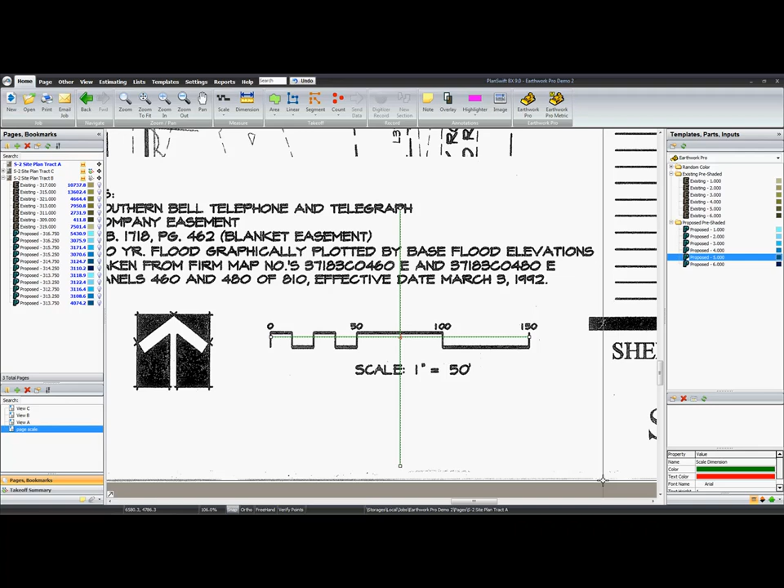Here it says 1 inch is equal to 50 feet. We can set that scale here from our drop down menu, 1 inch equals 50 feet. And when we get our disclaimer, we need to double check that the scale is set correctly. So we'll click agree and choose the dimension tool to check the scale. Now this scale shows 150 just past the line, so it's really off by maybe a few inches.

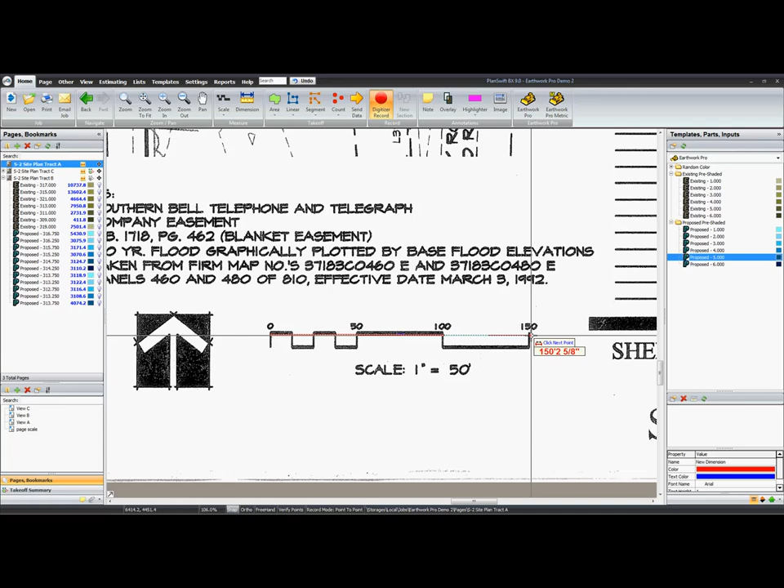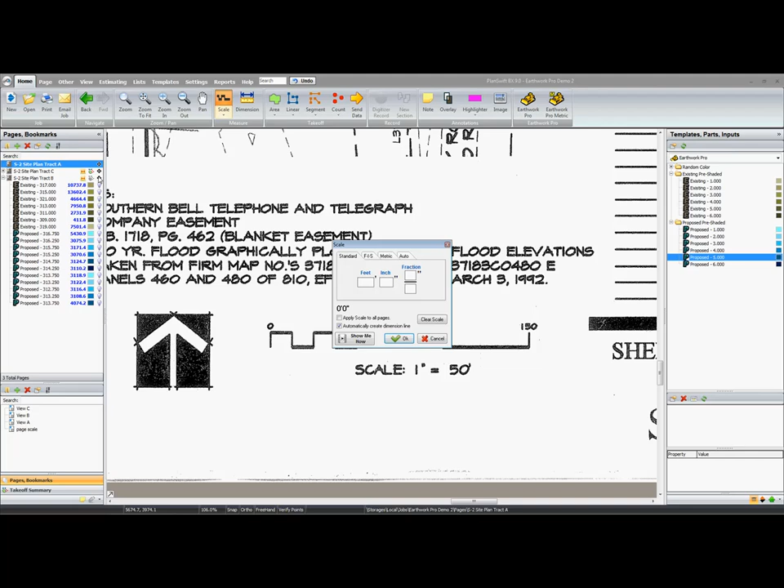I can go ahead and redo the scale by typing in the dimension needed. So I'm going to go to my scale button, click the upper portion of the button, and clear the scale off of the page. You will notice that this marker, this indicator here on each page, will go ahead and clear out the scale.

So now we want to go ahead and set the scale equal to this dimension from 0 to 150. And we'll begin by clicking scale again. We'll type 150 and click OK. Now the program asks me to click the first point of the dimension for scaling.

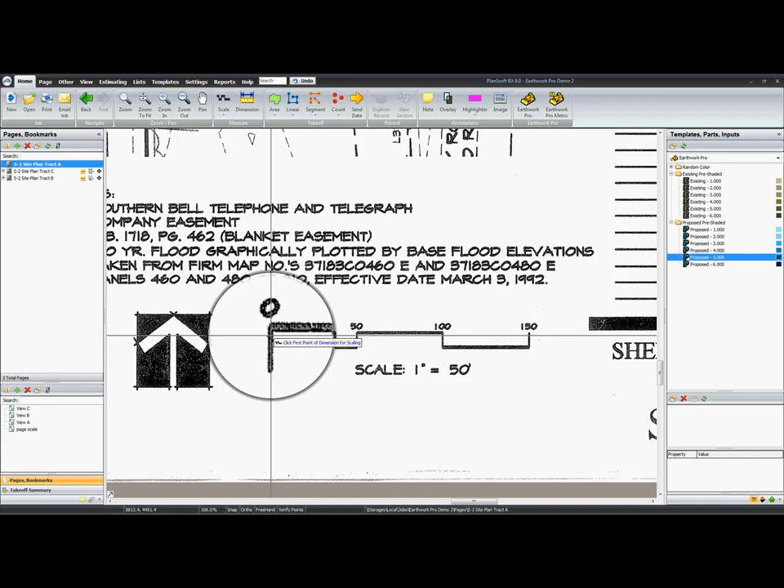Now if I press and hold down M on the keyboard, I can magnify and zoom in to the center point of the line, and this will make my scale more accurate. However, it's only going to scale this in the x-axis. I also need the y-axis set to scale.

So the way we can do this, if we don't have a dimension going vertically, we can take the dimension line we just used, click on it to select it, and then I will go to my other tab and click rotate to the left to rotate that dimension line. Then I can now use my own dimension line to scale this page vertically. So I'll go back to my scale button, I'll click that, and I'll type in 150 again and click OK.

Now to get it exactly to the distance I've already set this dimension, I'm going to click the snap button. It's down on the bottom toolbar of PlanSwift. There's a black toolbar. When I click snap, I get a red box that snaps to points that I've already set up, and that will set my dimension in the X and Y axis, and you can see that by that marker here on this page. You always need to make sure your pages are set to have both X and Y axis.

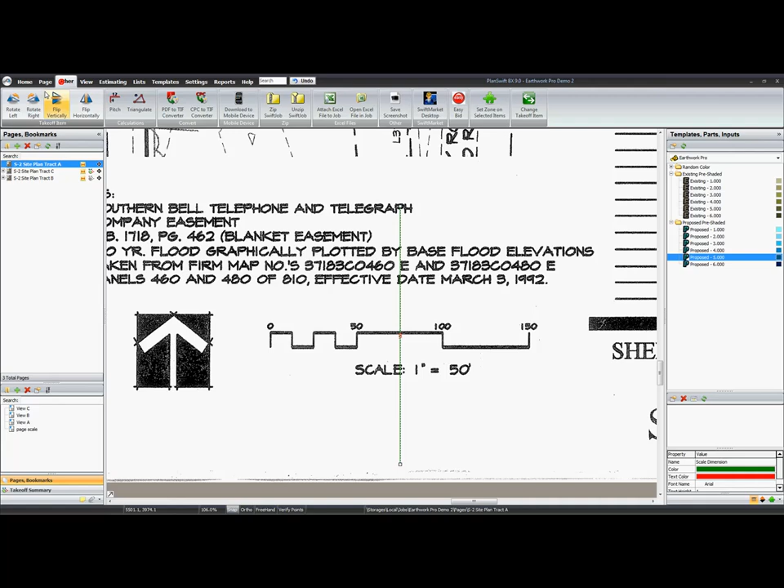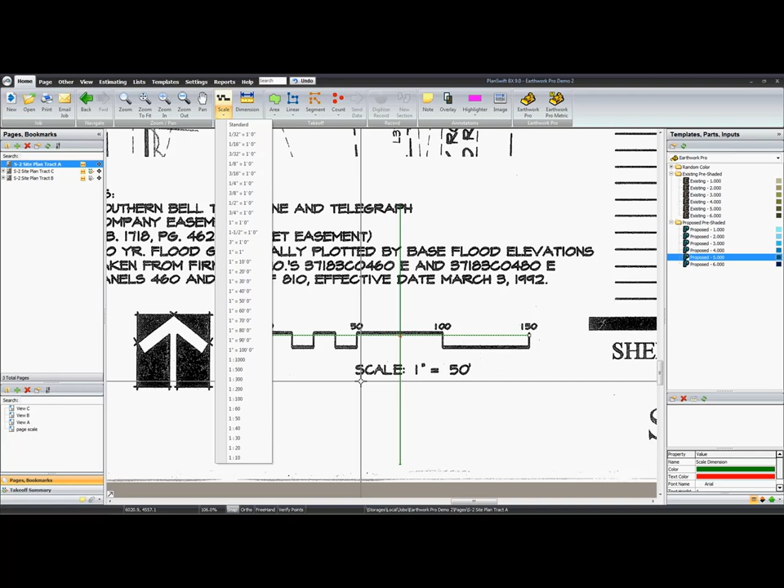And by default, when you use the automatic scale or the drop down scale here, it does automatically scale in both the X and Y axis. However, it is critical to note that when you use this drop down scale, you do need to double check dimensions to make sure your scale is set properly. Once you know your scale is set properly, then you can begin.

So I'm going to go to our area of interest. For this demo, we're going to be talking about lots 23 through 33. This is what we'd like to analyze. And basically, we need to take a look at the existing contours and then the proposed contours.

Now, Earthwork Pro for PlanSwift is much different than other programs that are out there. PlanSwift is really a two-dimensional program, and we use two-dimensional tools, but we're going to add in a third dimension by assigning each area of interest an elevation.

So on the right hand side of PlanSwift, you'll have a drop down menu, and after you've installed the Earthwork Pro plugin, you'll see this Earthwork Pro option. Same for Earthwork Pro metric. And when we click that option here, there's 3 folders. The first folder has random colors of these 2 templates, existing and proposed, with just a generic 100 elevation there.

I personally prefer to use pre-shaded coloring, and it will assign a color of brown for existing or blue for proposed. Now the numbers 1 through 6, this just means there's 6 values of shaded brown. These numbers are just really placeholders for each shade, and you can use them over and over. All of these are essentially the same template with just a slightly different color. So if I use 1 through 6 and I need to do a 7th or 8th, just cycle back through the numbers.

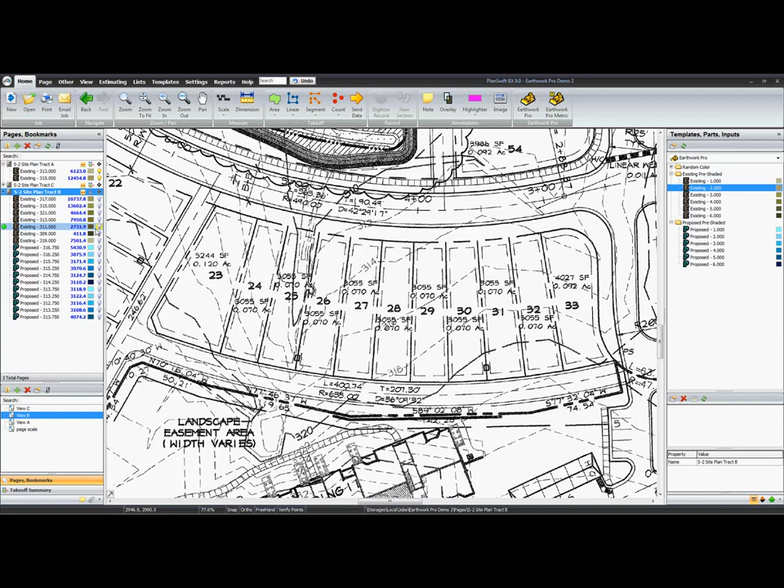So after doing all of this for all of these existing contours, what we'd ultimately end up with, let me show you a different view, would look like this. As we fill these in, again starting from 313, we'd have that contour, and you'll notice on 313 this contour went up and came back across lot 33.

So one of the things that I may need to do, once I've put in this 313, would be to create a new section of that, and I can right click anytime on that section and just choose the option new section from my right click menu, and I can come back and continue to digitize to create that new section here.

Okay, so again, we had so far 313, then 315, then 317, and then we had 319, 321, 311, and 309. And all of those existing contours basically created this blanket of area through my entire site of interest, lots 23 through 33.

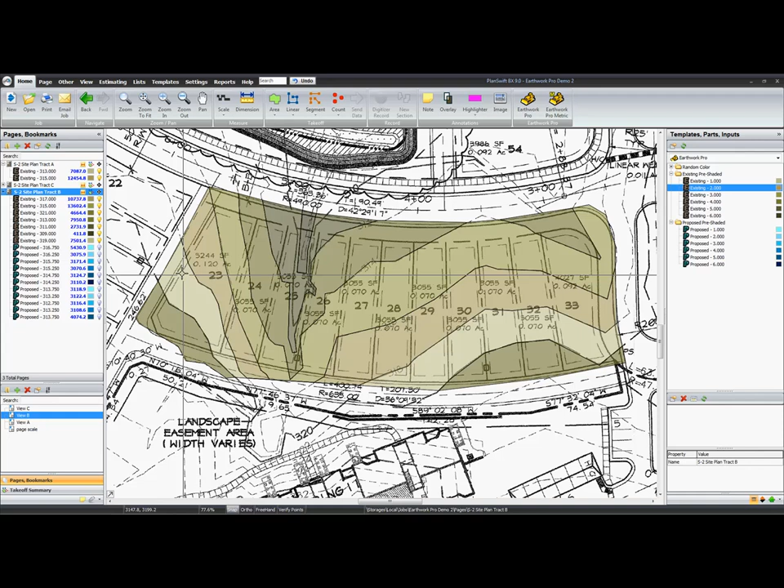The next thing we would do would be to create another section of the lots or the proposed areas themselves. Now, on certain plans, you're going to have just spot points or point elevations or spot elevations for your proposed. Maybe it would be the top of curb, or it would be a foundation. Ultimately, you just have to kind of create where those contours would be for your proposed.

Now, in this particular example, I used each lot and assigned each lot an elevation. So you can see when we go in and turn on these layers, each lot itself had an elevation, and we assign that lot a specific elevation going across the board.

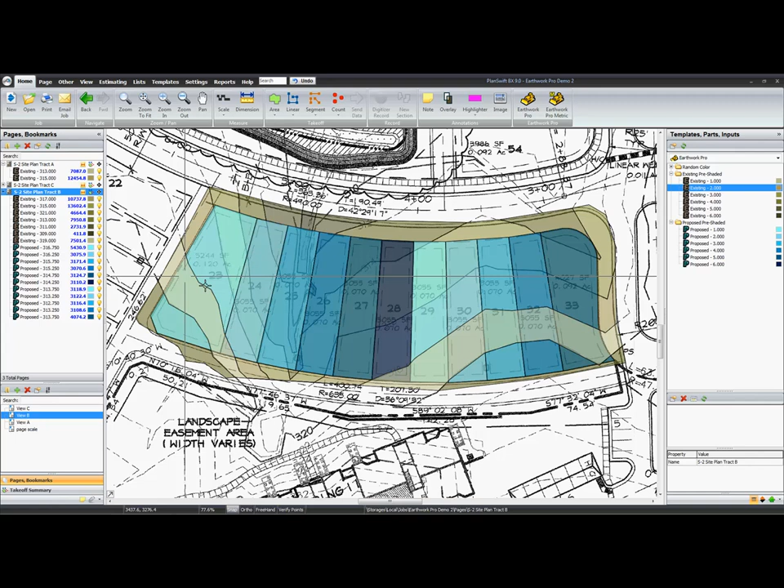Okay. Now, ultimately, where these lots for my proposed overlap my existing, that creates an area of interest. What will be analyzed is wherever these two different types overlap each other. So wherever I have proposed overlapping existing, that's where we're going to calculate our totals.

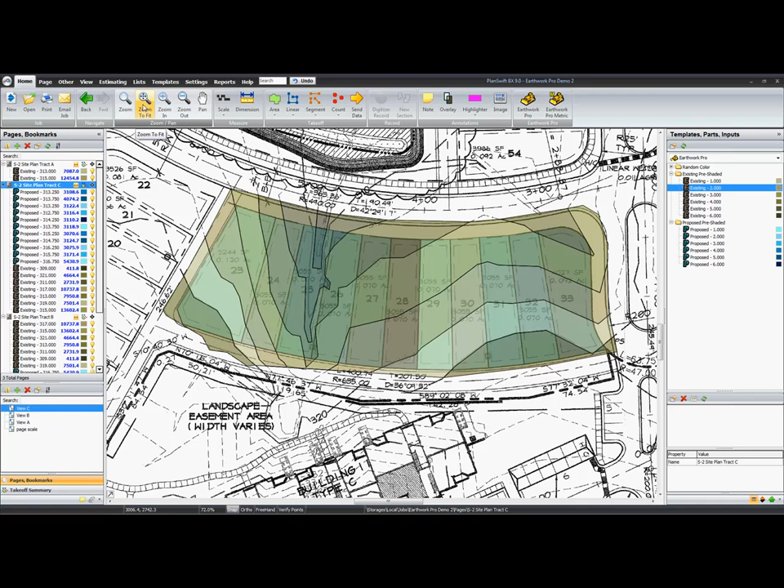So now moving on, we're just going to go to another view real quick, and we're going to select the area for calculations. Now, what I actually like to do is hit my zoom to fit button, which will show me the entire page, and then I can come to the top left corner of the page and left click and drag this light blue box, which will select everything. The reason I do this is I want to make sure to select all of my areas, so we can see that they are all selected here.

And then once I know I have everything selected, both existing and proposed, I'm going to click Earthwork Pro. Selecting Earthwork Pro pops up this little window here for the tool. Now, you have a range of calculation sizes. You can go from as small as 3 square inches to 2 square feet, or 24 by 24 inches. For a site like this, I'm going to choose 12 by 12 inches.

I'm going to analyze the entire site with an invisible grid. So at every single square foot, it's going to calculate the difference between existing and proposed and give me a volume. And once I get those volumes, it's going to also sort out which ones are cut and which ones are fill, and then give me a total of cuts and fills at the end of the calculations. So that's your calculation size.

You would want to use different ranges. Maybe for a fast food chain on a corner lot that's smaller than half an acre, you could use 3 inch by 3 inch. But anything that's several acres large, you'd want to go up in size. And so for now, we'll just go ahead and use 1 square foot.

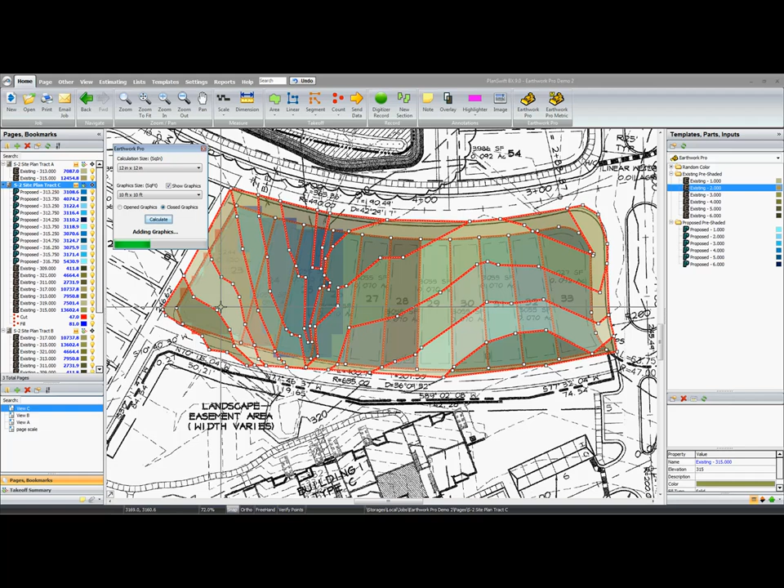The graphics, you can see, are kind of filling in these squares. Red squares would mean that there's a cut. Blue squares would mean there's a fill. And the size of each square in this particular case is 10 feet by 10 feet. And we can make them a little smaller, but PlanSwift's memory can't hold all the calculations and the graphics. It's too much for it to bear.

So you'll notice now everywhere where I've got this red in my area of interest, this would be where we're going to have to cut. So our existing would be too high. Everywhere where we've got blue, we're going to have to fill. So our existing would be too low. And this just gives you a good idea of where you're high or low.

You'll also notice it adds in a value here. This 261, that's how many white points there are. Okay, we're basically just using a square point count tool to generate these graphics. So that 261 does not mean how many yards of cut. This again does not mean how many yards of cut. Neither does this 112 mean how many yards of fill. What this actually means is there's 112 points here in the graphics.

Where we're going to go to find our values as far as cubic yards and how much actual volume we have, we're going to click on reports. And we're going to go to a report here on your report layouts. There's a report called Contour Breakout. This is where we actually see our cubic yards in total. So for each different contour, for contour 317, we have 988 cubic yards of cut. That value is in my cut column.

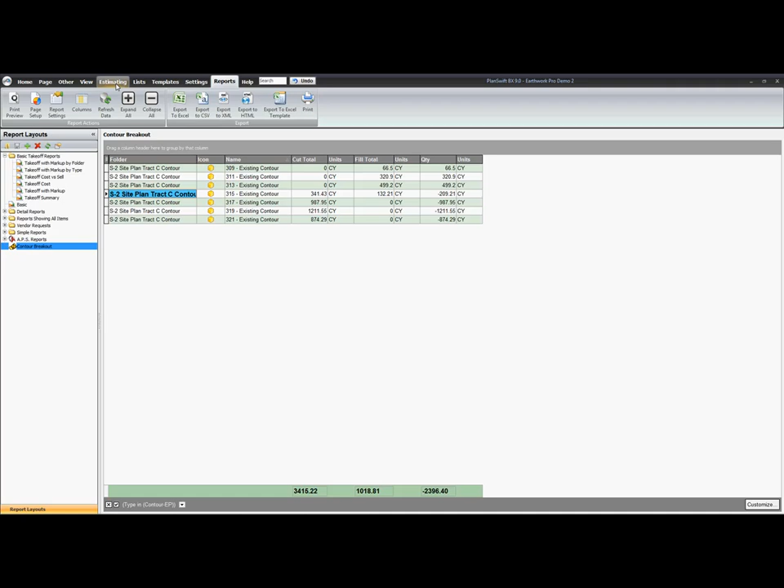So again, going to the estimating, you can right click on Earthwork Controls, go to Properties, and adjust your values here as a percentage if you need to make adjustments for expansion or contraction or any swell factors that you may use. And then I can set those back to 0, and these would be my bank cubic yards. Just a couple of other things that I want to mention for Earthwork Pro.

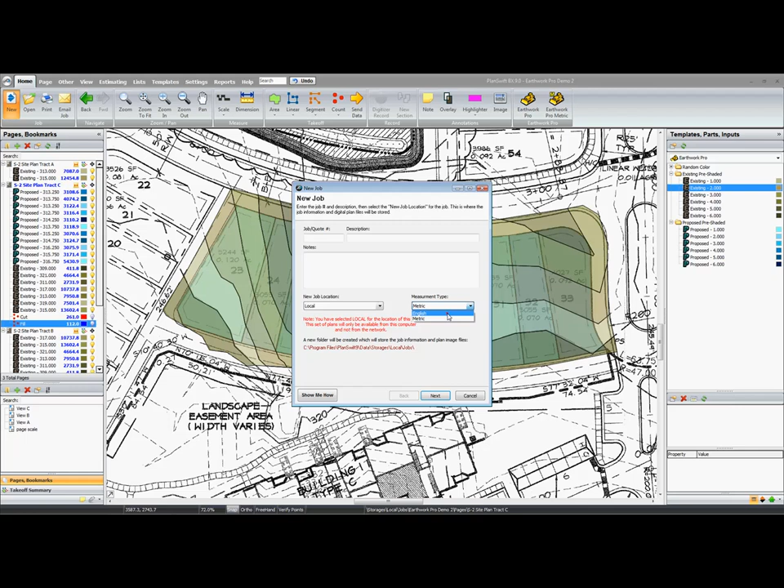If you're using the Earthwork Pro metric, you need to make sure in your settings that you go to the General option and set your default units to M for just meters. You want just your default units to be set to meters. You also need to, when you're creating a new project, make sure you set your measurement type to metric. Again, this is if you're using Earthwork Pro metric. So you need to have your default units set to meters and make sure you set your measurement type at the beginning of the project to metric.

That being said, let's say we wanted to analyze this again and do it on a more precise level, or let's say we want to look at the difference between how our cubic yards would come out if we calculated at 2 by 2 instead of every square foot. I'll just show you that here really quickly. So we're going to reselect it. We're going to click Earthwork Pro again. We're going to change our calculation size. And this time I'm also going to show what the graphics would look like if you choose this option for open graphics. It's basically going to just put in kind of a grid instead of a box.

So we'll go ahead and click Calculate, run our calculations, and then we're going to now add the graphics here, and it puts in more of a grid instead of a box. But again, it will still show red for cut and blue for fill. And it's again a personal preference if you want to show one type of graphic versus the other. Both of these are basically set on a grid of 10 feet by 10 feet. We'll get a glimpse of that here in just a moment. But again, anything that you choose for graphics has no bearing on the actual calculation.

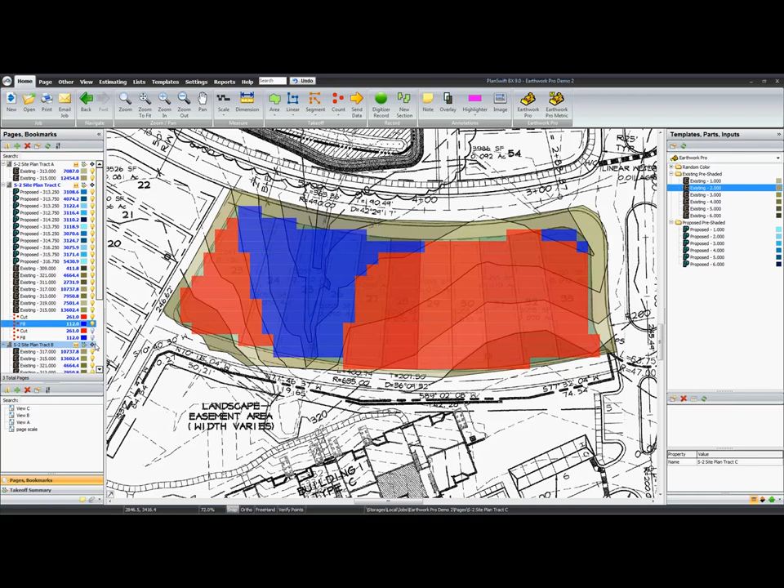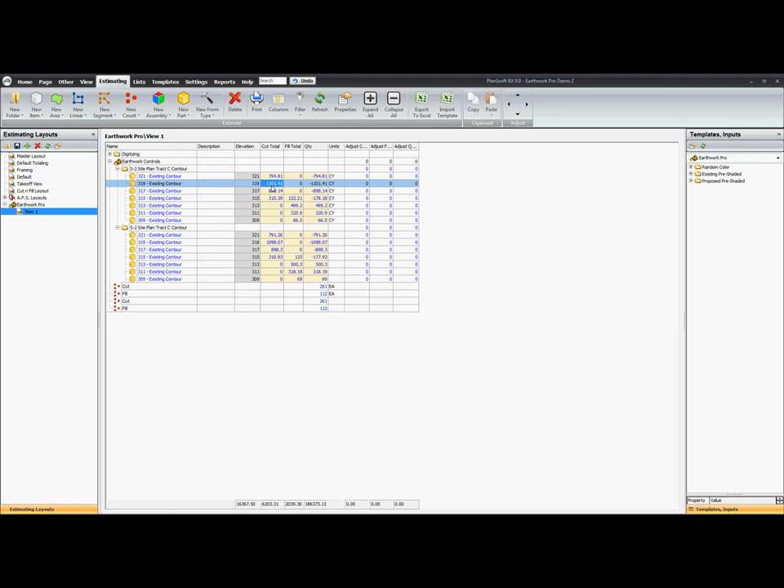But again, you also want to balance when you're talking about these calculation sizes. You want to balance what your computer's memory can handle. So if your memory starts to bog down on too small of a calculation, you can cancel that and go to a bigger calculation and it will run just fine. You do get a difference, but you can see just a few yards, 3 cubic yards here and a couple cubic yards here is really not going to make or break your bid when you're talking about thousands of cubic yards ultimately. That's everything for the Earthwork Pro plugin.